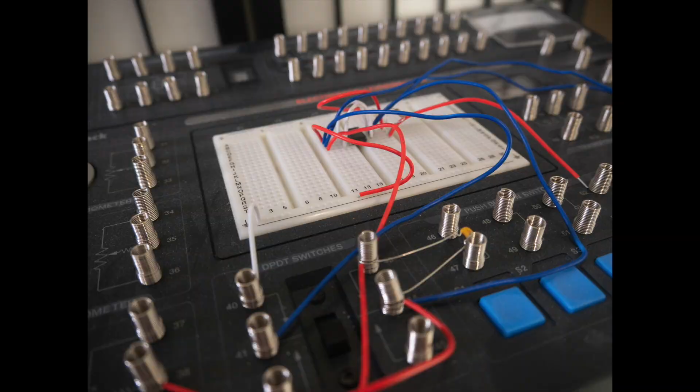Now let's start, before we talk about technique, talking about food safety. I print my cookie cutters from PLA. PLA is a biodegradable material, often made from corn. And the question is, is it safe to use with food?

Well, using something with food is a continuum. Is it safe to touch food with it? Is it safe to store food with it? Is it safe to cook food with it? So I treat PLA the same way I treat wood. I have wooden spoons, wooden cutting boards, wooden salad bowls.

Now, PLA produced from a 3D printer has very small holes in it. You can't necessarily see them, but they're potentially holes between the layers. Think of one bead sitting on top of another bead. There are little spaces there, and those spaces could capture bacteria.

So just as with wood, I wash my PLA utensils thoroughly. I don't use it for long-term storage of food. I'm pressing a cookie out of a sheet of dough, and I don't cook with them. So I'm very, very comfortable, even though I'm not a professional, not a food scientist, not a material scientist. But I'm pretty comfortable using a clean cookie cutter to press some dough that's then going to go into a hot oven in order to bake.

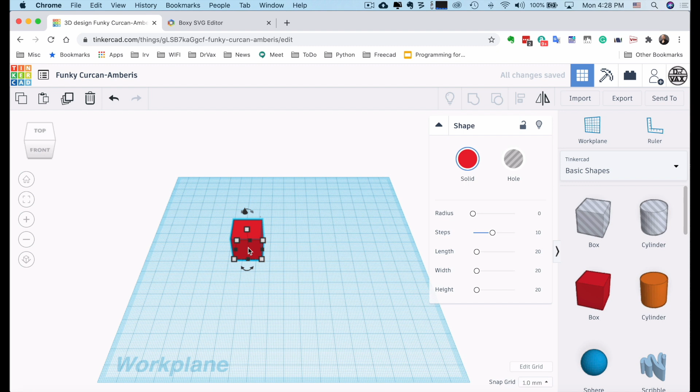So I'm going to create a new design by clicking on Create New Design. And then I want to show you a basic principle. I'm going to drag a box onto my work plane, grab a corner, and make it a little bigger.

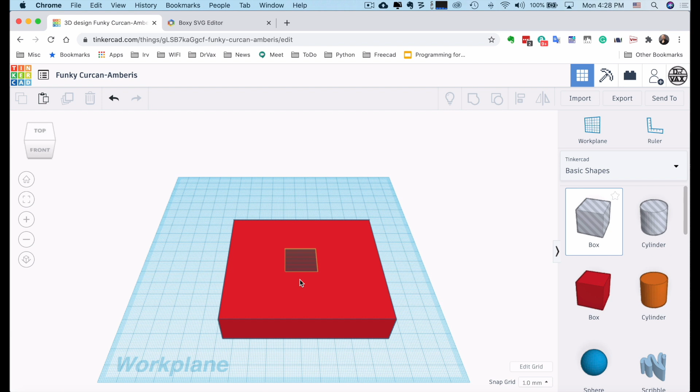Now, there are two types of objects in TinkerCAD. Those of you familiar with it already know this. There are solids and holes. You use holes to cut shapes out of a solid. So if I drag another box here, make it a little higher by dragging on that corner, and a little bigger, and then position it in this box...

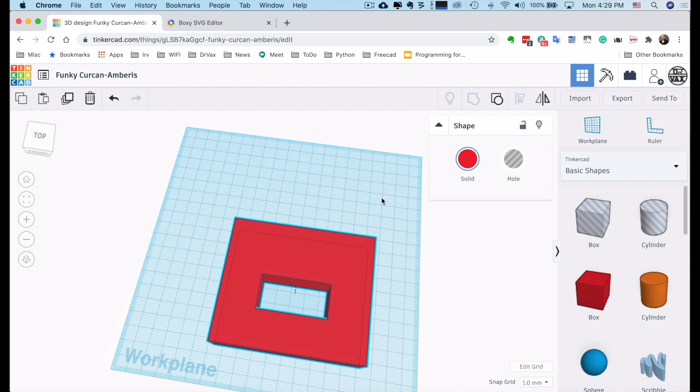Then I combine those two shapes together. I selected them both by dragging around them, and I'm going to click this icon to group. You will see we've now cut a hole in my box. So there are two shapes there. This is going to be very important. When you import an SVG file into TinkerCAD, the first shape creates a solid, the next shape you import creates a hole, then a solid, then a hole. There's a whole video on the channel about this principle.

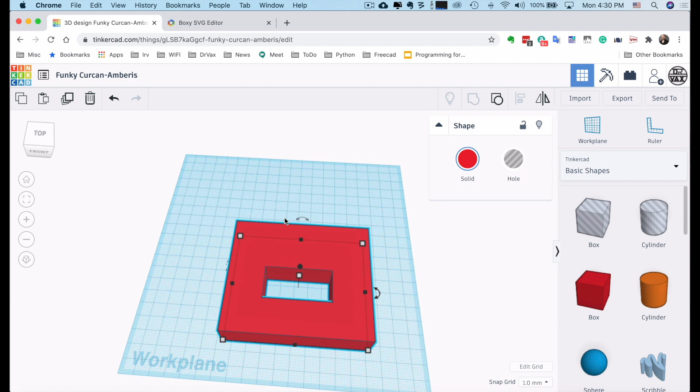For our purposes today, we're going to create one solid and one hole, so two SVG objects, the type of objects we're creating are called paths. Now, just to give you some more information, I can use the scroll wheel on my mouse to scroll in or out. I can right-click and hold the Command or Control key, depending on your computer, and rotate. I can right-click and hold the Shift key to move that around. That's pretty much all we're going to need to know about TinkerCAD to do cookie cutters.

Let me delete that. And now let's go to Boxy-SVG.

Boxy-SVG is boxy-svg.com. If you scroll down, you'll see all sorts of information about this program and the option to install it on a Mac, Windows, Linux, or a Chromebook, or to run it right off the web.

I followed the directions on the website to install it on my Mac, and I did license it for $9.99, about $10. Well worth every penny. You'll use it repeatedly to generate SVGs that you'll use with various computer-aided design programs.

So now let's leave the Boxy website. I'm going to click on my Boxy icon and open up Boxy-SVG. The first thing I'm going to do is File, New, and that's going to create a work area that I can draw in. There are a range of tools up and down the side and excellent tutorials right on the Boxy website about how to use those tools.

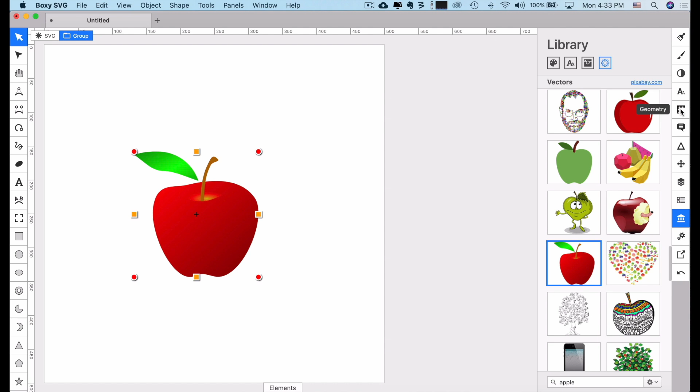We'll select this apple. It looks nice, and I'm going to drag it into the work surface and then make it a little bigger. One of the tools on the right-hand side looks like a ruler, and that will tell you the size of your object. So my object is 182 by 185.

Those sizes will translate to millimeters when you import into TinkerCAD. So if I import a 180 unit object into TinkerCAD, it'll become 180 millimeters. So I want this a little smaller.

I'm going to click on this, and if you click on it a second time, it will give you the option to manipulate this object. If you go back to the boxes being blue, it will scale it. I'm going to make it about 150 millimeters.

Now, this object is too complex for a cookie cutter. What we want to end up with is just the outline. So how do we do that? Well, we look at the details of the object and we convert it into a single path.

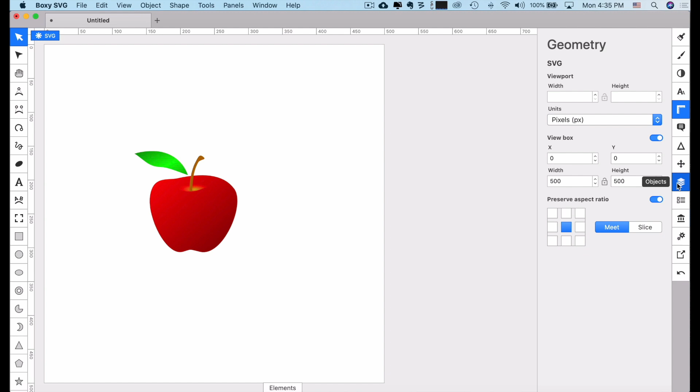I'm going to click on this link here that says object. We'll see our object, if I click on the triangle, has a number of different groups. So the first thing I want to do is get rid of those groups.

Let's try clicking on the topmost group and then go to arrangement, that's the two arrows there, and say ungroup. Go back to my object, and we'll see there are fewer groups here now. Arrangement, ungroup. We're getting a little better.

So let's select this one here, arrangement, ungroup. We're going to keep doing this until there are no groups. Arrangement, ungroup.

So now we see we have a series of components of this apple that are paths. But we want this to be a single path, not separate paths, because remember, when we import this into TinkerCAD, the first path will be a solid, the second path will be a hole. If we import this like this into TinkerCAD, we're going to have an absolute mess.

So I'm going to hold Shift and select all these paths, and then go to the Shape tool, the triangle right here, and say Unite. You'll notice this turned a single color, because now if I look at our objects, we have one path, a single object.

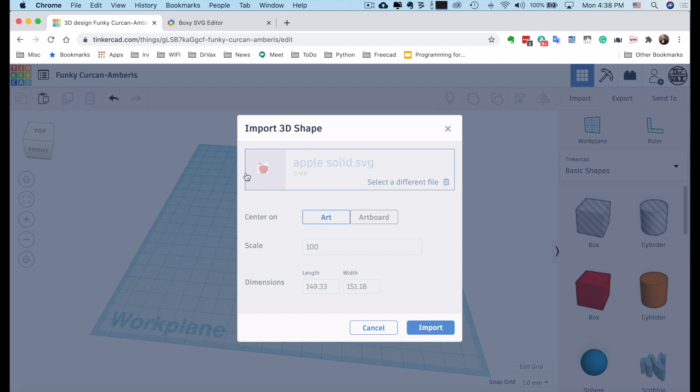Open it up. And you'll see it'll be 500 by 500, but if I limit it to just the art, not the artboard, it'll be basically 150 by 150, a little bit off. Let's import this. Now, that doesn't look like a cookie cutter to me.

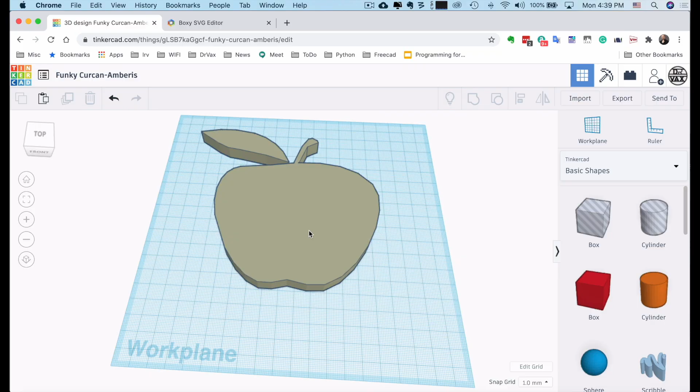And you might think that I could just duplicate this. I'll click on duplicate and hold Command and scale down a version and move it into the middle, but you'll see you can't really line these up when you do that. When you have complex shapes and you scale, you're not able to put one on top of the other and line it up. I don't really understand how that math works, but that's the way it is. What you need to do instead is draw another shape just inside the current shape, basically stroke inside of it. So this solid is not going to work.

So let's go back to Boxy-SVG and think about how we would do that. So I have a single path here. If I do an edit, duplicate, and now I go to my objects, we'll see we have two paths. So for the second object, I want to stroke it inside. How do I do that? Well, there's a function in Boxy-SVG to do exactly that. If I go here to Shapes,

I go to Inset. Every time I click this, my object will be brought in by 1 unit. Remember, a unit is a millimeter. So if I want my cookie cutter to be 2 millimeters wide, then I click on this twice. Now, to show you what happens, I'm going to go to Fill. I'm going to change the color of the inside object. And now you can see we have the outside object and the inside object.

If I look here, you'll see we still have just 2 paths. If I turn this path off, you'll see the red. If I turn this path off, you'll see the green. So now we are ready to export this object as an SVG, and we'll call this Apple Outline.svg, and we'll save it. And now let's go back to TinkerCAD.

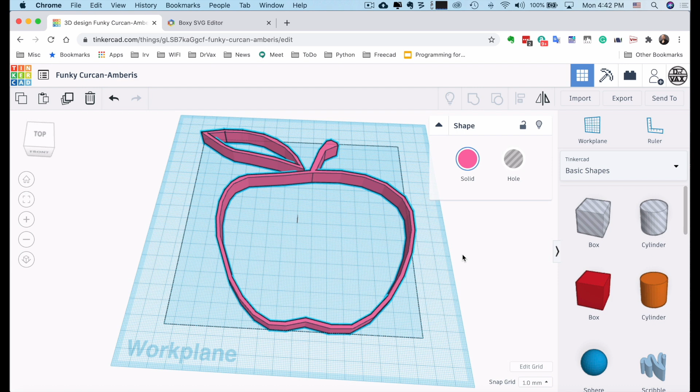I'm going to import this into TinkerCAD. So I'm importing Apple Outline. Import. Once again, we're going to import just the art. And we should end up with an apple that's just an outline that's about 150 millimeters in size. So if I click on this and I go to a corner, we see the sizes are exactly what we expected. Now, the one thing I have to be very careful of here, we'll scroll out a little bit, is I have to make sure this touches here. Otherwise, my cookie is going to fall apart.

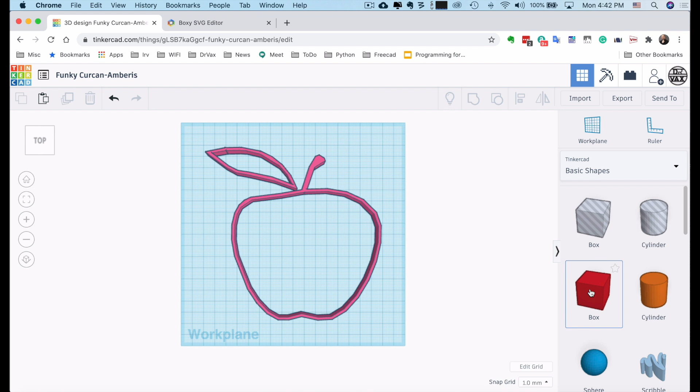Now, I can do that by drawing an extra line in Boxy-SVG, or I can put a base on that part of this cookie. So if I take a box and drag it in here, we'll look at it from a top view, and I'll show you a trick that I really like. This icon right down here says switch to flat view. Orthographic view, that makes it easier to work on things like this.

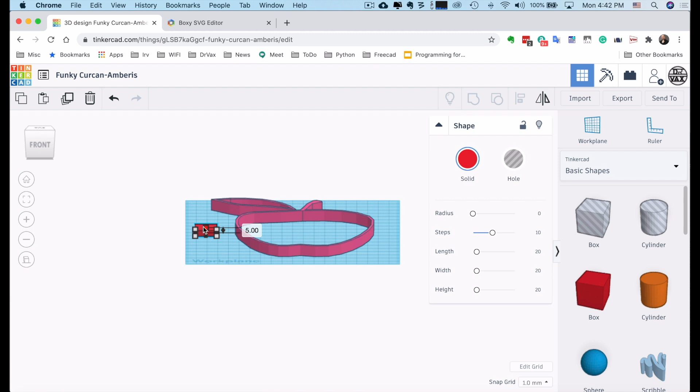We'll rotate this up, and I'm going to make this 1 millimeter deep. Then I'm going to rotate back down. I'm going to move this over here, but then I'm going to move it up so it's on the top, just overlapping the top. So that's going to make sure those pieces are held together.

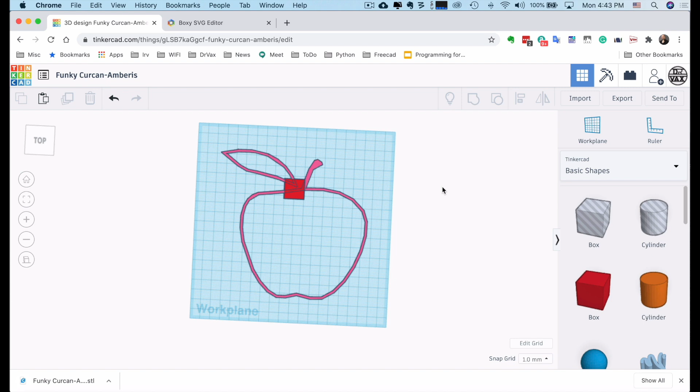So we started with Boxy-SVG. We took a complex shape. We made it a single path. We duplicated the shape. We did an inset twice to get a 2 millimeter wide, smaller shape. We aligned the shapes properly, and then we put a little helper here to make sure these pieces are together. So now let me export this as an STL file. Export, STL. And now we can load it into a slicer.

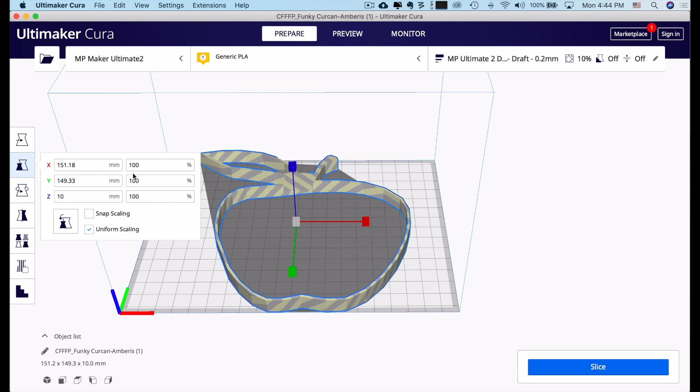So I'm going to go to the download folder, which is where the file will be on my computer, and open it up. And there is our cookie cutter all ready to print. Now it's a little too big for this particular printer. This is the Monoprice Ultimate 2, which is exactly 150. So we're going to scale this down uniformly by 90%, just so it'll fit there. I'm going to slice it, and it tells me that in 54 minutes, I will have a cookie cutter.

Now, in this particular version, I actually moved the stem down a little bit. I edited it before I simplified the path. So folks, it will take you some trial and error, but the procedure is really very simple. You select an SVG, you can select from the library, or you can do a file import in Boxy-SVG. You ungroup it all, then you unite it into a single path. You make sure everything's touching, then you duplicate it. You do an inset a couple times to create an inner version.

You align it properly, and you save it as an SVG. Then you import that into TinkerCAD. You save it, export it as an STL file, and you are ready to print cookie cutters for the holidays. Folks, I hope this was helpful. I hope you learned something. I've tried lots of techniques over the years. This is the simplest. I hope this new technique helps you out.